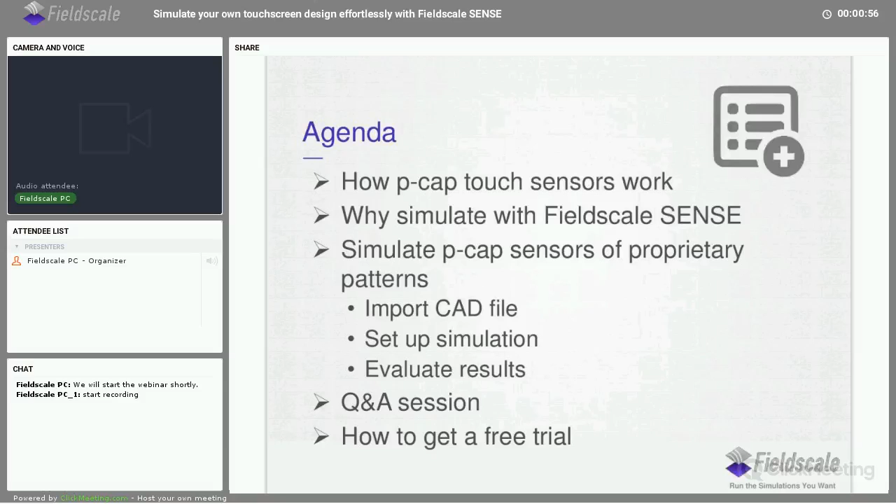The projected capacitive touch sensors consist of transmitting and receiving electrodes. The shape and dimensions of the electrode patterns are subjected to detailed research and development process. And there are many proprietary patterns out there, most often patented by the designers of touch sensors.

Generally, electrode patterns may be placed at two separate layers, the double layer patterns, or at the same layer and get joined with bridges, with crossovers. Actually, this pattern is known as coplanar or single ITO pattern. But in true single layer patterns, there are no crossovers, although the transmitting and the receiving electrodes are again at the same layer.

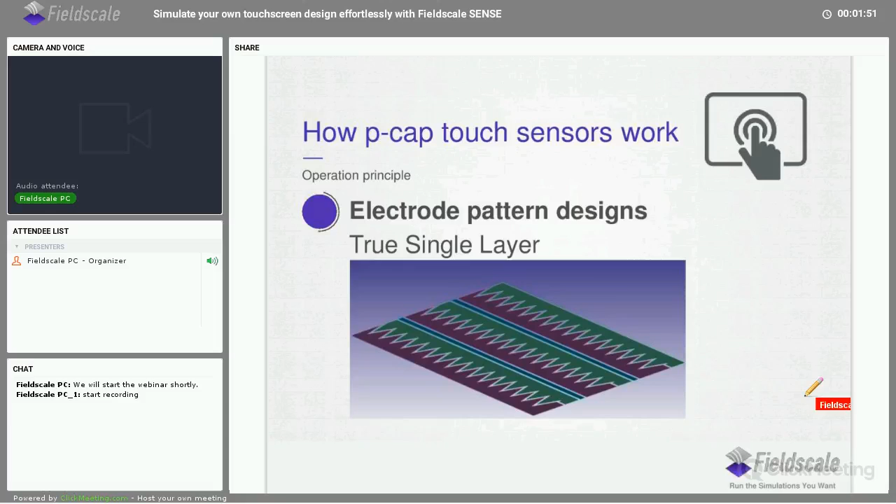Metal mesh is a new entry in touchscreen industry. It can be used to create flexible touch sensors with high transparency and high conductivity, and can be found in both double or true single layer patterns.

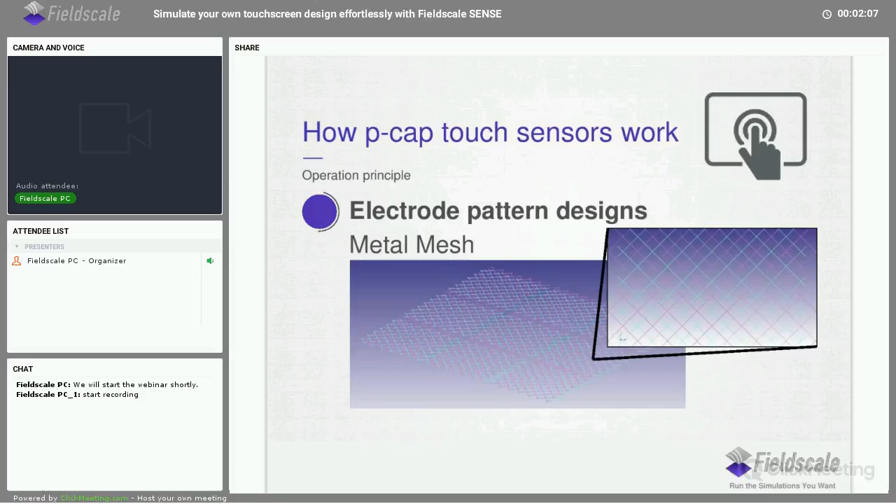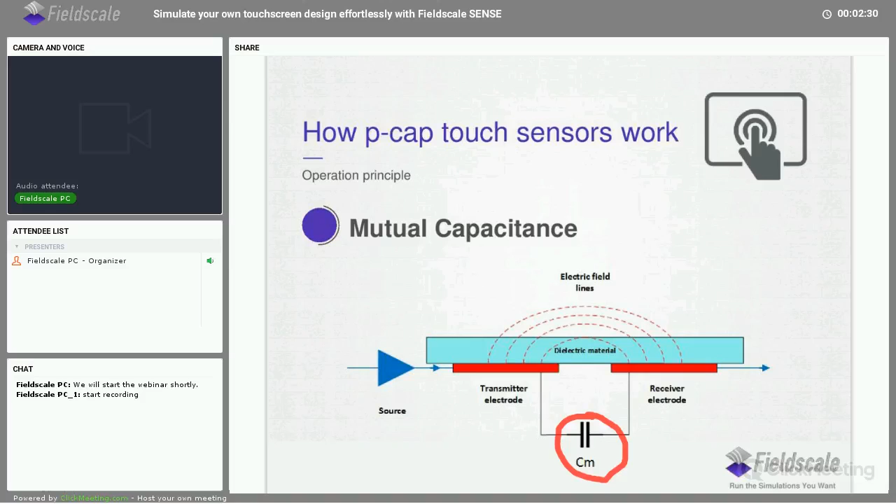Now let's see how the touch sensors work. Actually, between the transmitters and the receivers there is a mutual capacitance due to their coupling. The value of the mutual capacitance depends on the shape and dimensions of the electrode pattern and also the distance and the material between the electrodes.

Now, in case that a finger or a stylus comes close to the touch sensor, it steals, let's say, some of the electric field lines. So the mutual capacitance between the electrodes is reduced. The controller that drives the touch sensor sends voltage pulses to the transmitting electrodes and gets them back distorted through the receivers. The change in the amplitude of the voltage signal corresponds to a reduced value of mutual capacitance. And that's how a finger touch is detected by the controller.

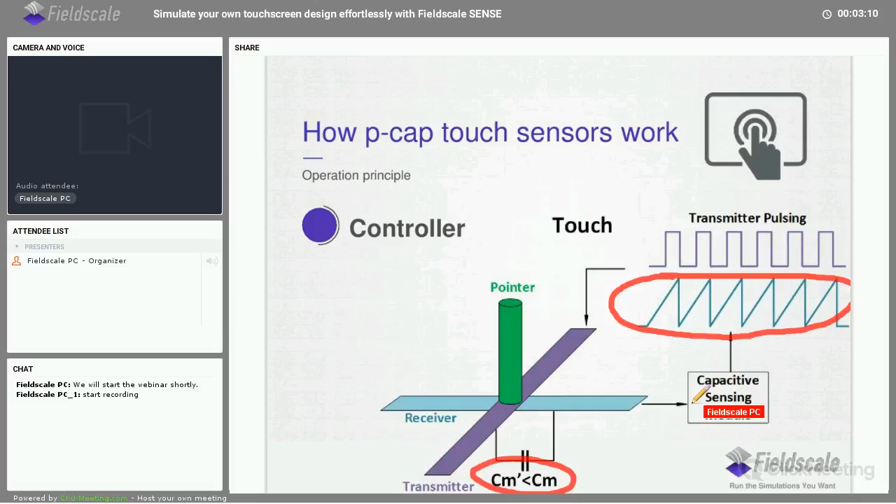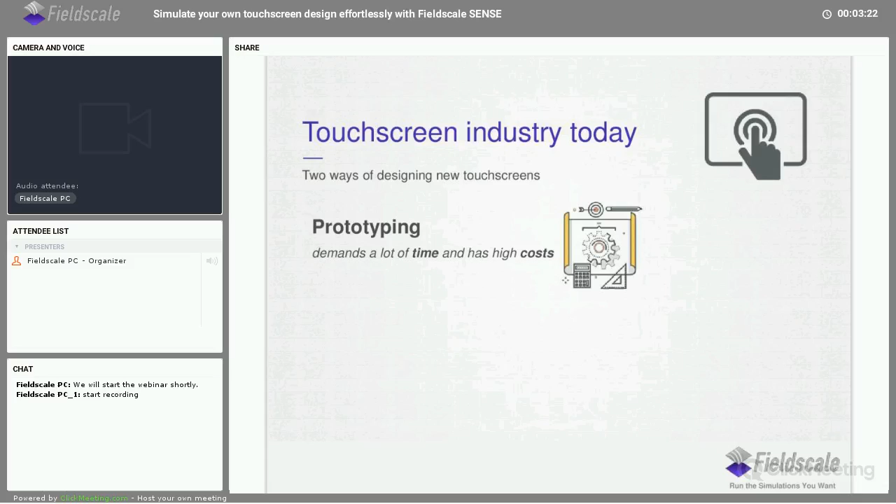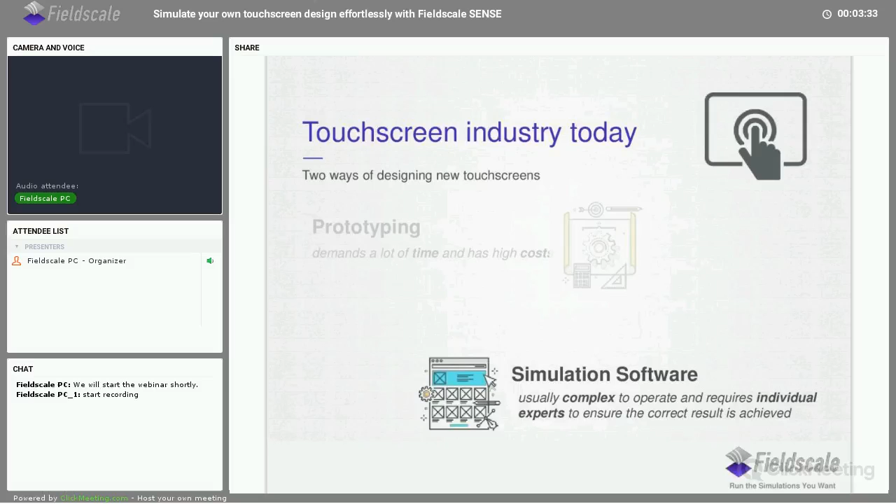Now let's have a look at how touchscreen industry works. Research and development of touch sensors was traditionally done through prototyping process, which however is time consuming and also very expensive. Simulation, of course, is an alternative option, but simulation software in general was usually complex to operate and required expert users.

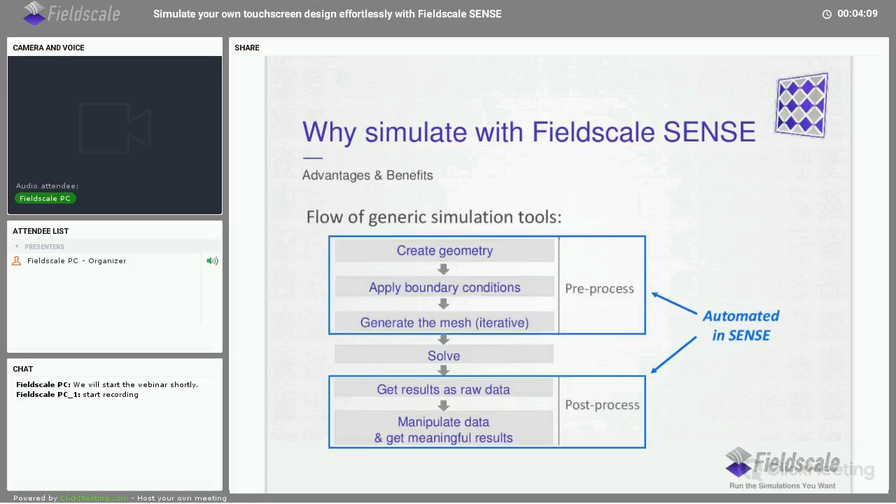This is the flow of the generic simulation tools. The touch sensor designers in generic simulation tools had to create the model geometry, then to apply the boundary conditions and generate the mesh, which is often a really difficult task. After the model was solved, they had to get the results and try to translate them into their engineering language. That's why we developed Sense, in which both the pre- and post-processes are fully automated.

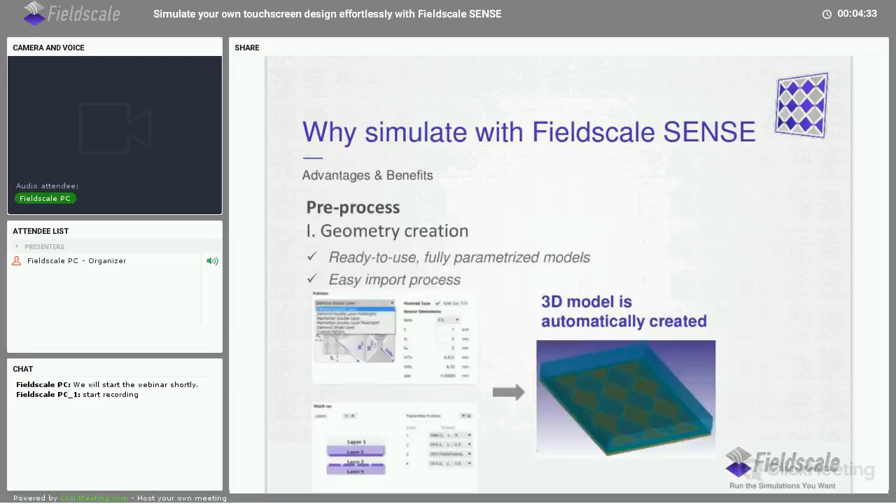Regarding the geometry creation, we have a library of ready-to-use and fully parameterized patterns, so the entire 3D sensor model is automatically created. In addition, Sense offers you the option to import your own patterns. This will be demonstrated later in detail. Through an intuitive way, you can set up parametric analysis so as to examine the performance of the touch sensor for many, even hundreds of different finger or stylus positions above the surface of the sensor.

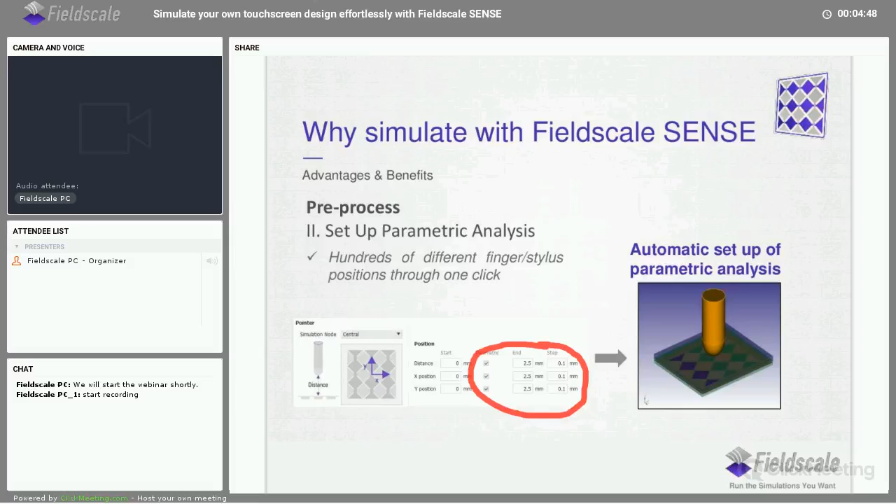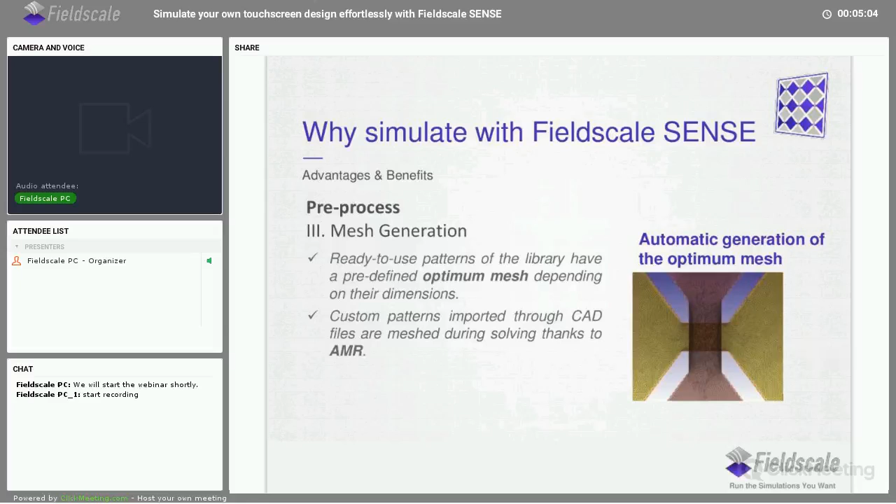You don't even have to worry about the mesh generation or how dense it must be in order to get accurate results. This is done completely by Sense, either through predefined meshing options or through smart algorithms, which are based on adaptive mesh refinement. The simulation time is much shorter than competition, as Sense utilizes fast multipole method developed on the basis of boundary element method. And thanks to the fully parallelized solving algorithms, you can take advantage of multiple CPU cores available either in our cloud infrastructure or in your cluster and solve the model just in a few minutes.

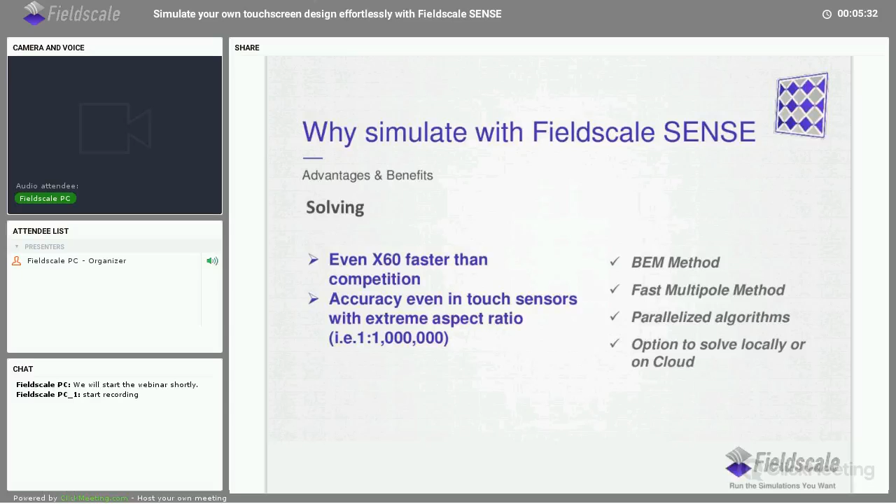Regarding the post-process, the visualization of results is adjusted to the needs of touch sensor designers. The results are shown through intuitive capacitance maps and plots, which are familiar to touch sensor designers. The comparison between the results and the specifications of the controller allows you to check the compatibility between the sensor and the controller. Furthermore, you can export all the simulation results in either a CSV file format or use our export tool to create a customizable report in PDF format.

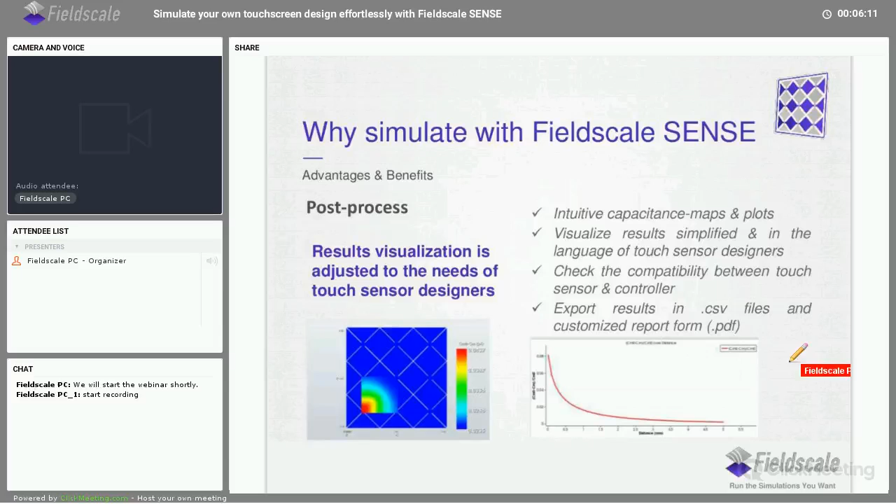Now Sakis is ready to show you the very simple process of importing and simulating customized electrode patterns into Sense.

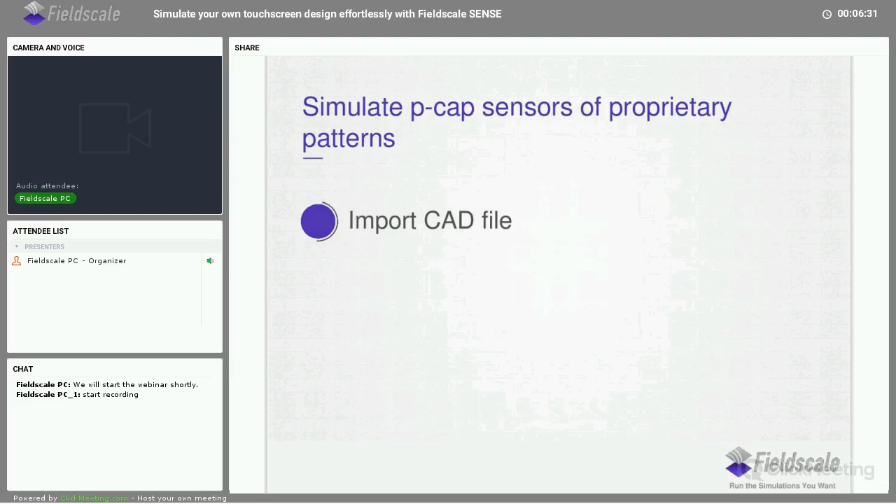Before showing you how the import process works, I have to show you a few ground rules that you have to follow when designing the DXF files used for the import. First of all, the imported pattern should be a 3x3 design, which means that it must consist of 3 transmitter and 3 receiver electrodes. Another rule is that each electrode group should be assigned to different layers.

For example, the 3 receivers should be on a layer called, let's say, RX, and the remaining transmitters on a separate layer called, for example, TX. Also, the design can include the floating parts, which are basically infills or dummy conductors, as long as they are assigned to a separate layer. Another rule is that each entity of the DXF file should be a closed polyline and not just a connected line. You have to convert the line to a polyline.

The current version of Sense supports the import of any double-layered pattern, including also metal mesh patterns and patterns with curved electrodes. I will demonstrate 4 examples. We will create a DXF file from scratch, ready to be imported, and I will showcase another 3 examples: one metal mesh pattern, another pattern consisting of diamonds and floating parts, and another one with curved electrodes. Excuse me. Now let me share my screen with you.

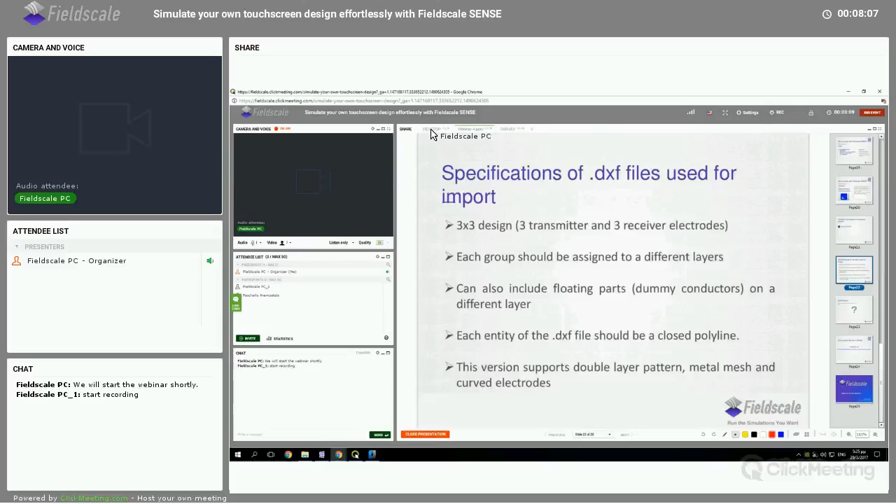Let's say that we have a DXF file that contains the whole sensor design. As you can see, this design is a design of a sensor that consists of 10 receivers and 15 transmitters. And we now have to make a few adjustments to this DXF file. For starters, let's create 2 separate layers. Let's name the first one receivers. And let's create another one called transmitters. Those are just basic operations that can be performed with any CAD software.

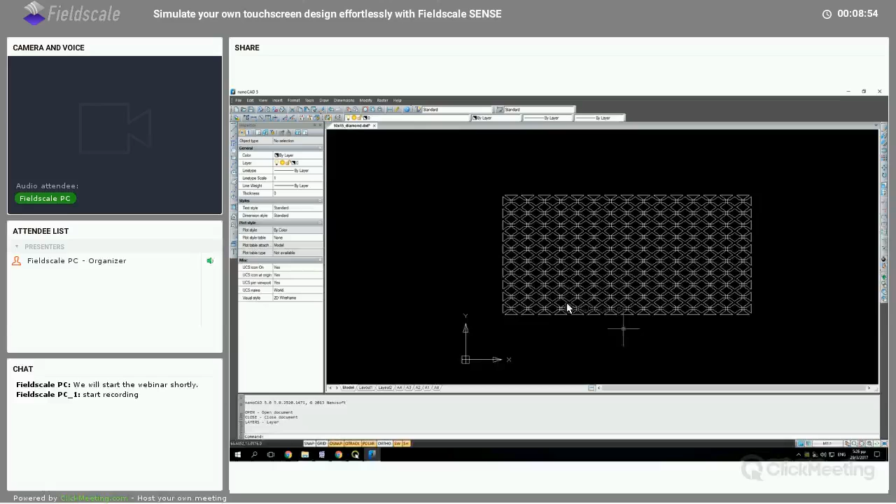Okay, as you can see, we don't need all those transmitters and receivers, so let's delete the majority of them and keep only 3 transmitters and 3 receivers. We have to slightly modify the receivers and the transmitters, and to do this, we first have to explode those polylines. As you can see, this entity is a polyline, and in order to modify it, we have to first explode it. This can be easily done by a command called explode.

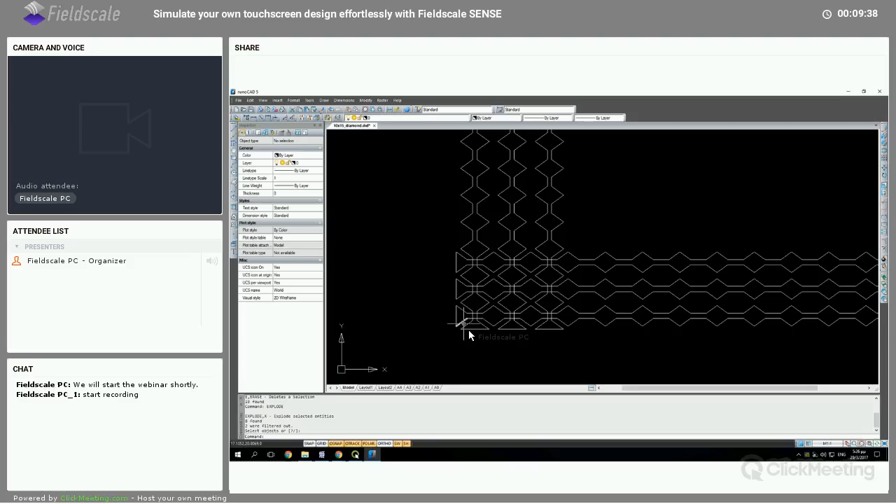And let's select all of the electrodes. As you can see now, the electrodes are ready to be modified, and we can delete all the lines that we don't need. We have to create a closed polyline, so we will have to draw some additional lines. This is really easy, and you have to repeat this process for all the electrodes.

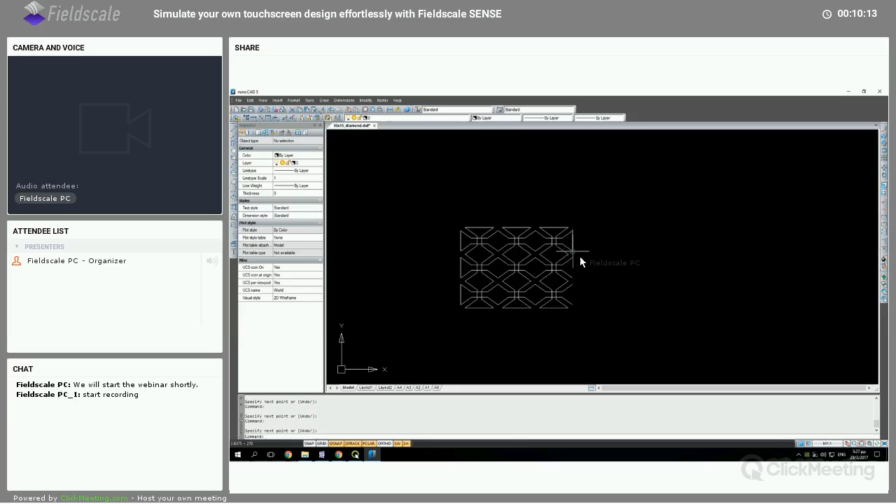Okay, now that we have a closed loop of lines, we have to convert those lines back to polylines. This can be easily done as well. Let's start with the transmitters. The software asks us if we want to turn this into a polyline. We click yes, and then we click to join it with the rest of the lines. Now you just have to be a little careful to select the correct lines, but this isn't too difficult. Hit enter, and as you can see, we have created the closed polyline.

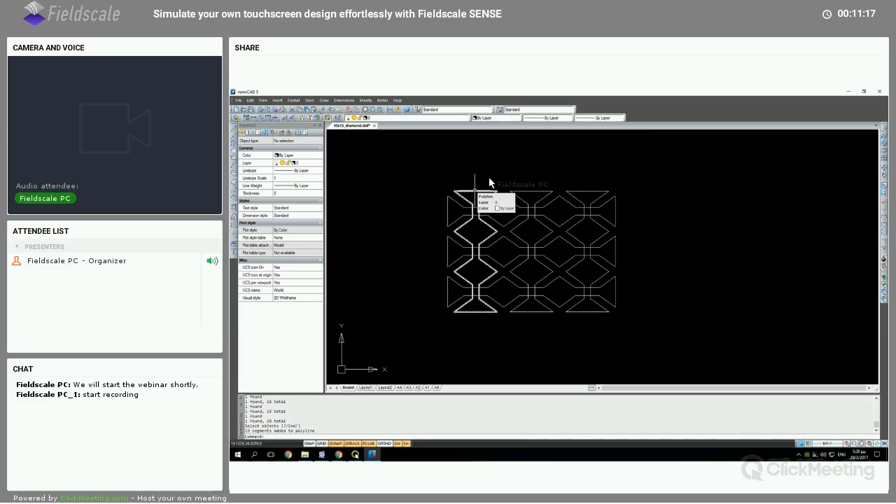Now we have to repeat the same process for the rest of the transmitters. This shouldn't take long. Okay, this one is also ready. And let's do this one last time.

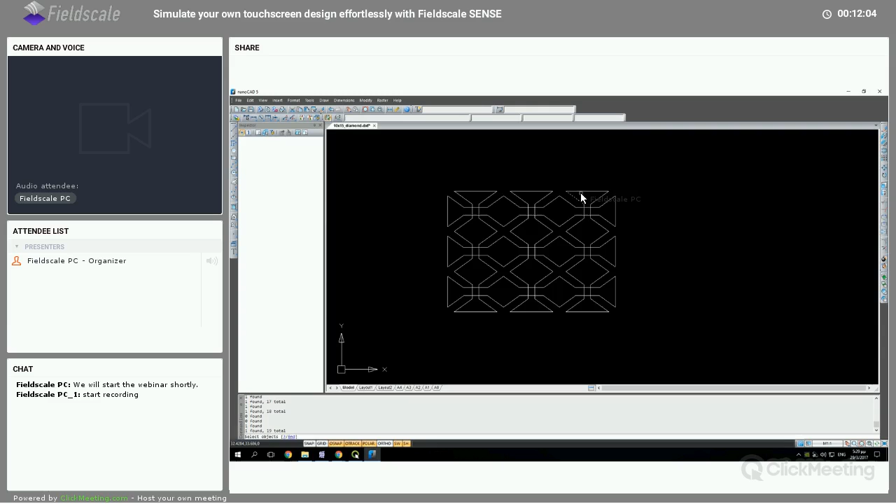Okay, so we have three transmitters, three entities that are closed polylines, and let's place them to the correct layer, which is the transmitter layer. This should do the trick. Let's confirm that they are placed there. Yes, that's right.

And now we have to do the same process for the receivers. This time the process is a bit easier because we can select multiple lines. That's it.

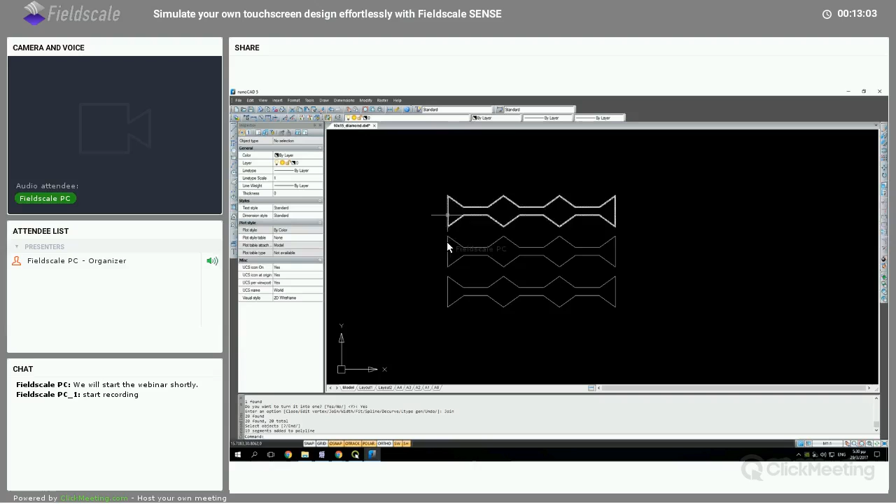Okay, and the receivers are also ready. Let's place them onto their own layer. And let's check that each layer is correct. Yes, we are ready. Now all you have to do is save it as a DXF file. Okay, let's call this one Diamonds Test. And save it on the desktop.

And let's see now how we can import this DXF file into Sense. First of all, you have to navigate to the pattern section of Sense, and then on the scroll down menu, you have to select Custom Pattern. By clicking Create New, you open up the Sense Design tool. Basically, the Sense Design tool is the import module and the tool with which you can design your own patterns. We will click on CAD Import.

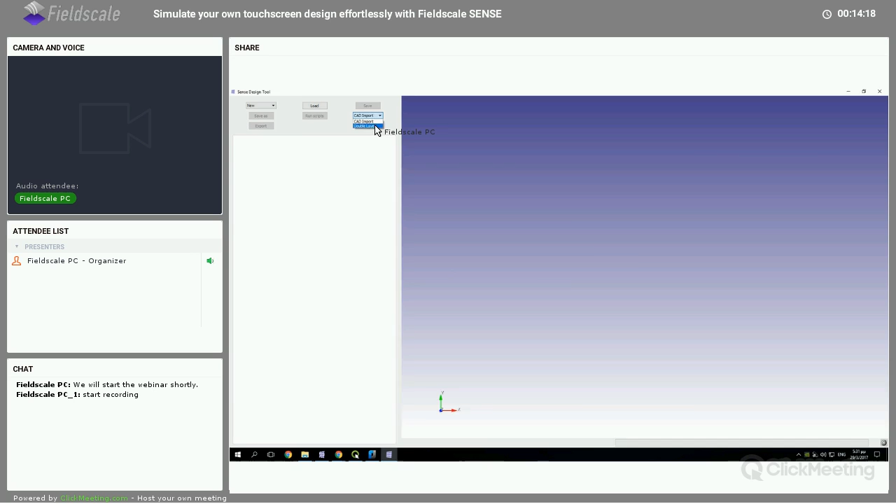At the time, we support the import of only double-layered patterns, but by the end of April, it will also be available to import the coplanar patterns, and on the next versions, you will also be able to import through single layers and whatever else you would like. Now let's open the CAD file. This is the one that we have created.

And as you can see, the layer extractor recognizes the two layers that we have created, and it informed us that there are three entities in each layer. Now you have to assign each layer to the receivers and the transmitters, and just click Import. As you can see, Sense has imported the DXF file, and now you are ready to export it into an SDS file, which is basically the file that can be imported as a pattern into Sense.

Also note that this yellow line represents the dielectric margins around the electrodes. You can specify this from the margins tab. And let's give this pattern a margin of 1 millimeter on the y-axis and 2 millimeters on the x-axis, and redraw it. As you can see, we have added a thicker dielectric margin around the electrodes. Now, by clicking export, we will create the SDS file. Let's save this on the desktop as well.

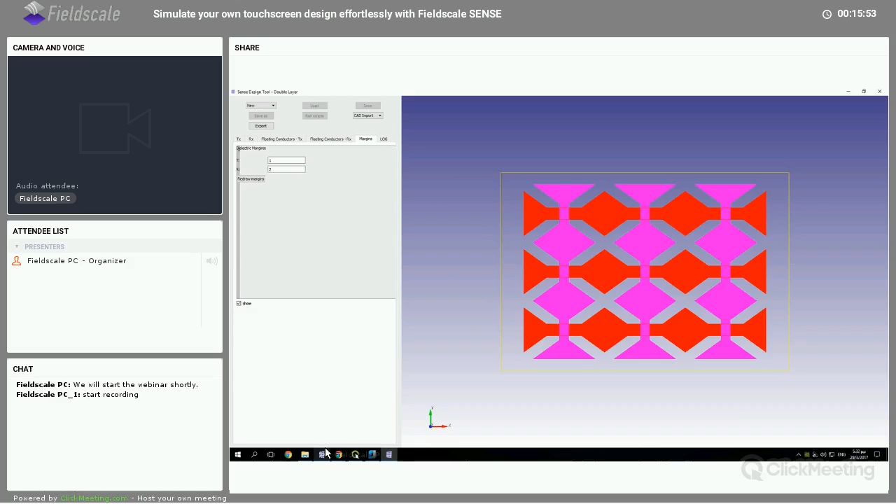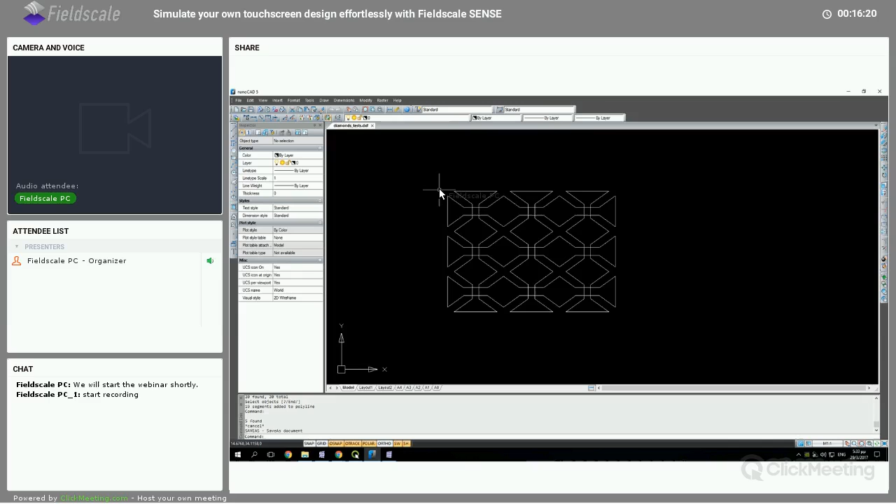And now move back to Sense GUI. By clicking load, you can load up the pattern that you have created. Now you are basically ready to set up the simulation, and Vasilis will briefly explain later on the different options that are present in Sense. Now just bear with me a little while longer. I will show you another 3 examples. We won't create them from scratch. I have created them earlier, so as to save you some time.

Let's open up the diamond with the floating parts. Okay, so there's a lot going on right now. Let me turn some layers off in order for you to understand what we did here. As you can see, those are the receivers, 3 receivers, and with yellow, those are the floating infills or the dummy conductors that are present. And the same holds true for the transmitters as well. Let me show you those as well. You can see 3 transmitters and floating parts.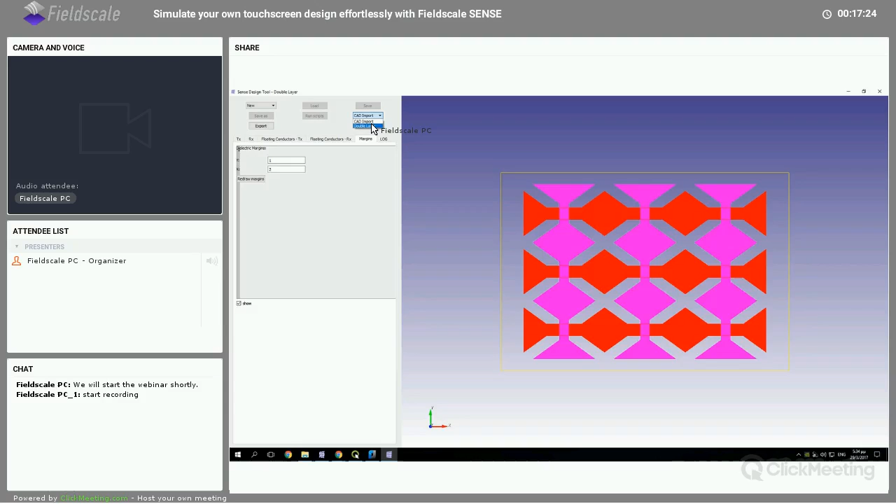You have to follow the same process as earlier in order to import it into the Sense GUI. First of all, click Import, CAD Import. Open the DXF file. As you can see now, we have more layers because there are 2 additional layers representing the floating parts. You have to assign layers again. And just click Import.

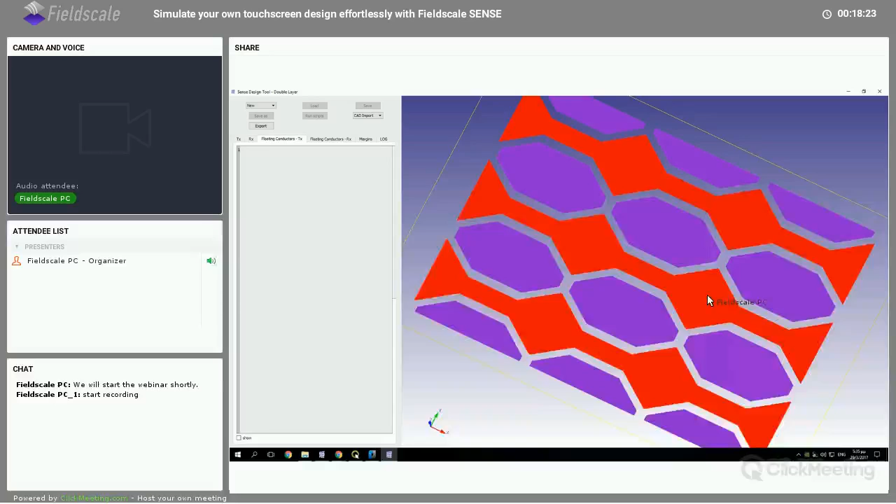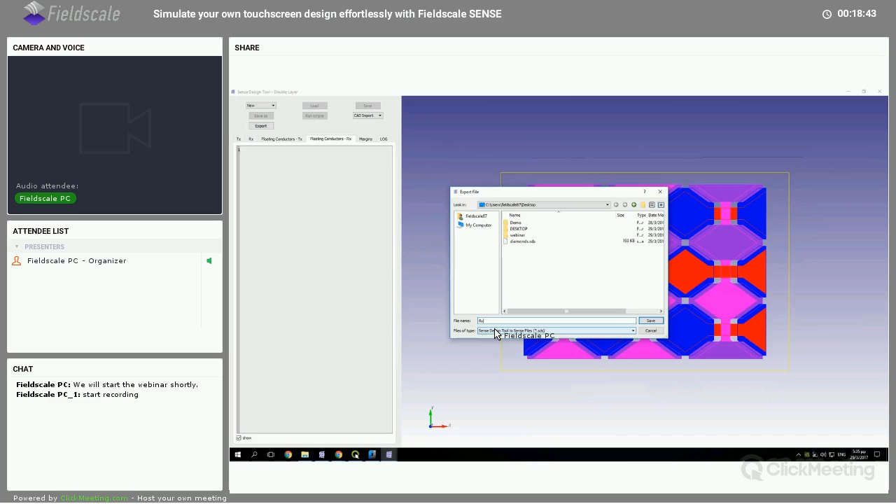As you can see, the image is a little bit crowded right now, but you can toggle visibility on and off from this button, which says Show. If you uncheck it, you can turn visibility of those entities off. And now you can review your pattern if it is correct and if the design has any flaws. And you can do the same for the receivers as well. Now let's click Export and call this floating. And then you can just load it up in Sense again.

Okay, let's see now a metal mesh pattern. Metal mesh patterns are a little bit more demanding, but we handle them quite easily. As you can see, this is again a 3x3 pattern. Let's import it into Sense. As you can see, this is a quite dense mesh. You can see each electrode has been imported correctly.

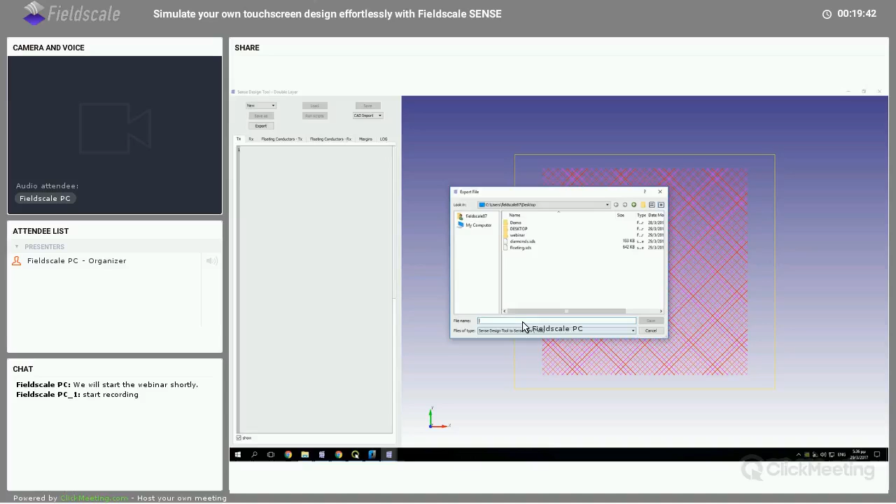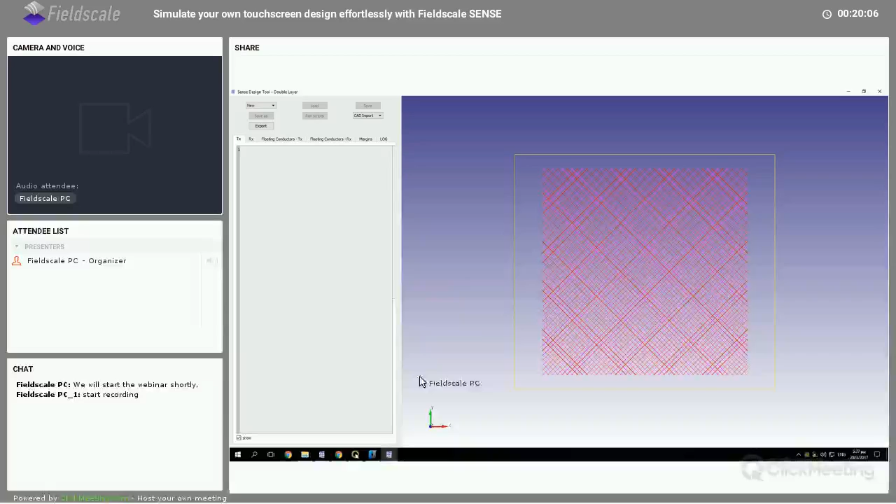Now the process is again the same. You just click Export and save it as an SDS file. I can demonstrate this again. And now you can proceed solving the metal mesh pattern and setting up your dielectric stack-up and figure positions and so on. Now let me show you the last example of a pattern which has curved electrodes.

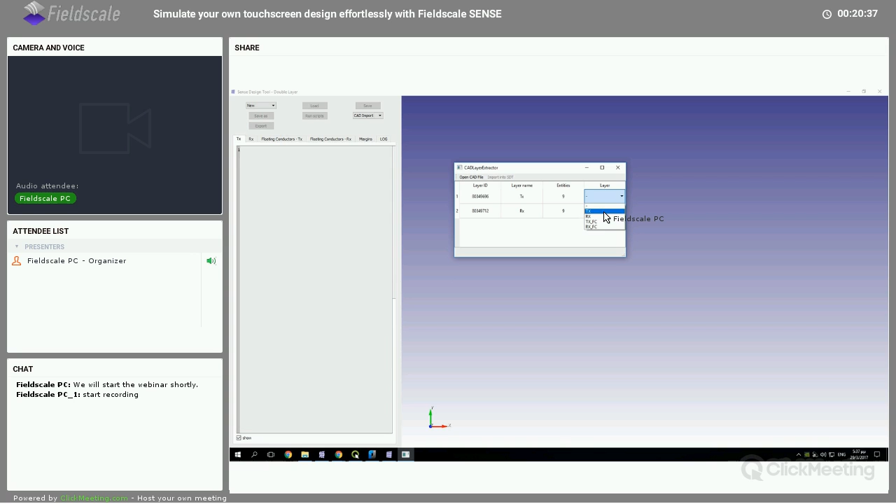As you can see now, the CAD layer extractor says that there are more entities present. This isn't a bug or a problem. It's just the way that the DXF was designed. Sense will stitch those entities together and create the 3x3 pattern. As you can see, again, the pattern consists of 6 electrodes, 3 transmitters, and 3 receivers, with curved lines.

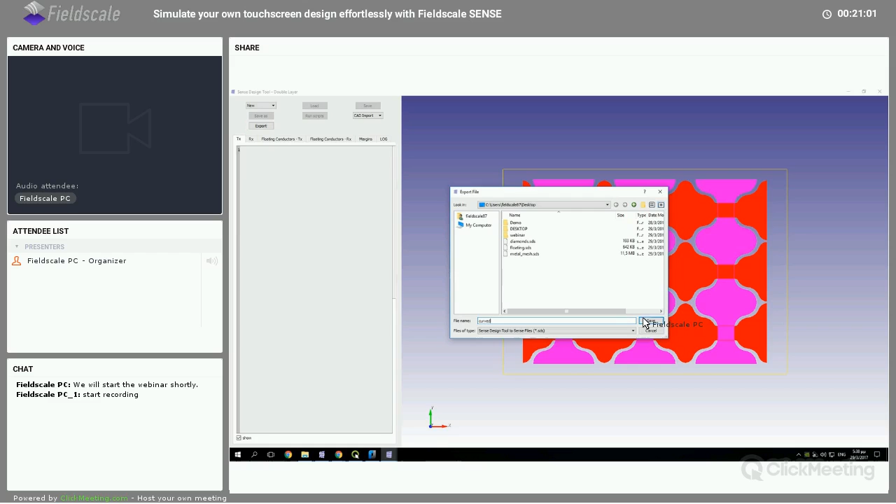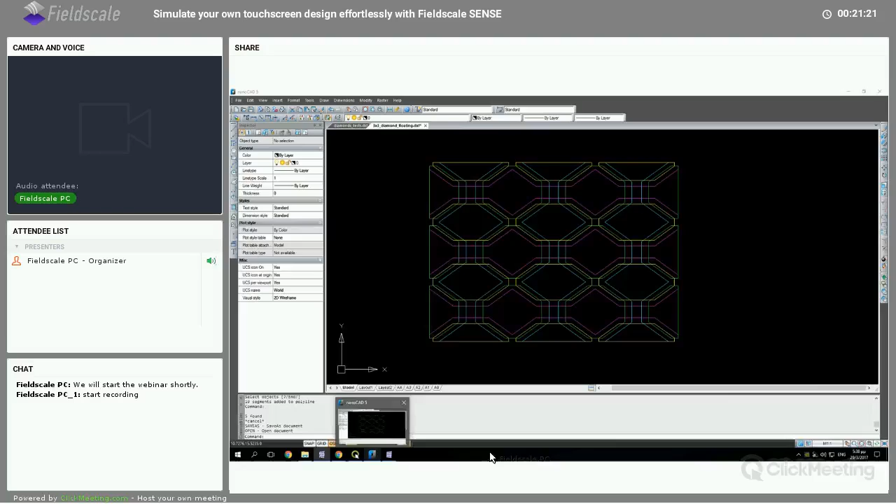And by now, you already know the process. Just click Export. Let's name this curved. And let's open this up from the load button. And that's basically it. I think it's a quite simple process. It doesn't take up a lot of time. As you can see, you can create any DXF file in less than 10 minutes, let's say.

And now I will give the microphone back to Vasilis. He will talk a little bit about the Sense GUI and how to set up a simulation. Thank you, Sakis, for the presentation about the import tool. Actually, I'll show you now briefly the process that one has to follow in order to get some results.

So firstly, the user has to set up the analysis type. For example, the sensor may be a mutual or a self-capacitive one. Or we could hold the smartphone, for example. In this case, it's an Earth model, or maybe it's left on the table. So here we have to select the floating model.

Through Sense, the user can check the compatibility between the touch sensor and the controller. That's why we have included in Sense a library of several commercially available controllers, which differ, first of all, in the number of transmitters and receivers that they can support, which actually depends on the size of the sensor, and the range of the capacitance that they can support.

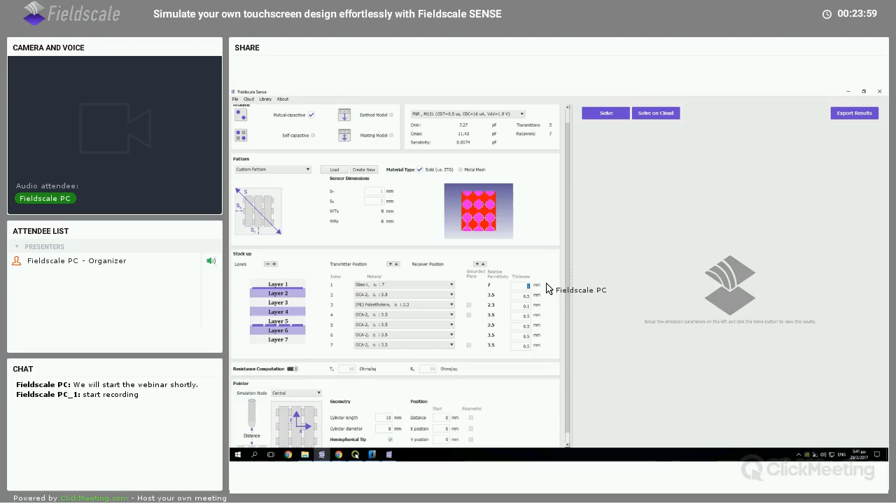You can change the material. For example, you may have a glass on top of the touch sensor, and of course you can insert the thickness of each dielectric layer. So here you define the materials from the top of the touch sensor to its bottom, where a grounded plane, maybe for shielding purposes, may exist.

What comes next? The user has to define if they want to have results about the resistance of the electrodes. These results are very important for the designers of touch sensors, since together with the capacitance, it defines the charge time of the touch sensor, the performance of the touch sensor. So here the user has to give the value of the sheet resistance of the transmitting and the receiving electrodes respectively.

The most important feature of Sense is that the user can set up very easily a parametric analysis regarding the performance of the touch sensor for several, even hundreds of different finger positions. So the user simply has to define the start and the end point of the finger movement along each direction, the Z, X and Y direction, and of course define the step of this finger movement.

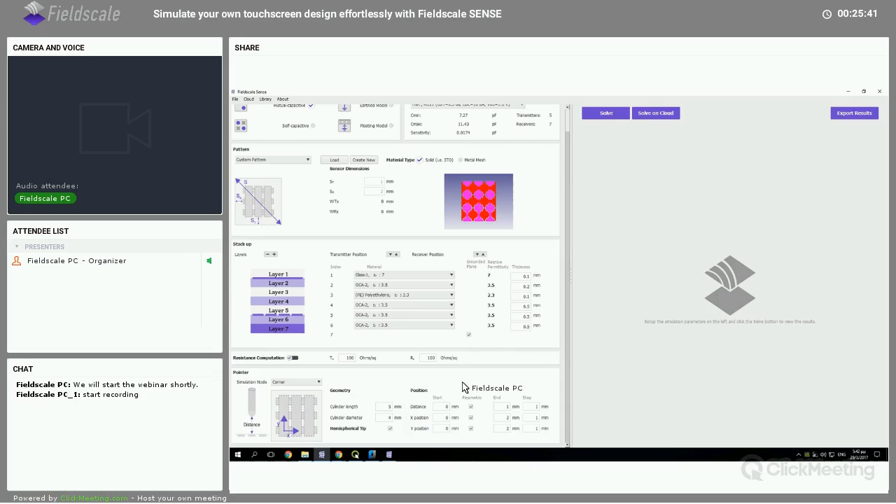Of course, we can get results for different simulation nodes, if it is a central, edge, or corner node, and change the dimensions of the pointer, if it is a finger or a stylus, for example. So once the simulation is set up, I'll show you the results by loading a solved diamond double layer pattern. These are the results of Sense.

Here you can see the sensitivity of the controller as defined earlier by the user. And this is the value of the mutual capacitance between the electrodes without any finger presence. Here we see the values of the resistance of one unit cell of transmitters and receivers respectively. This heat map shows the simulated 3x3 electrode array.

But at the corner of the node, this reduction is much smaller, and it is depicted by the blue color here. Of course, the heat map may give different quantities regarding simulation results of capacitance and resistance of the touch sensor. And what is very useful for the touchscreen designers is this filtering option.

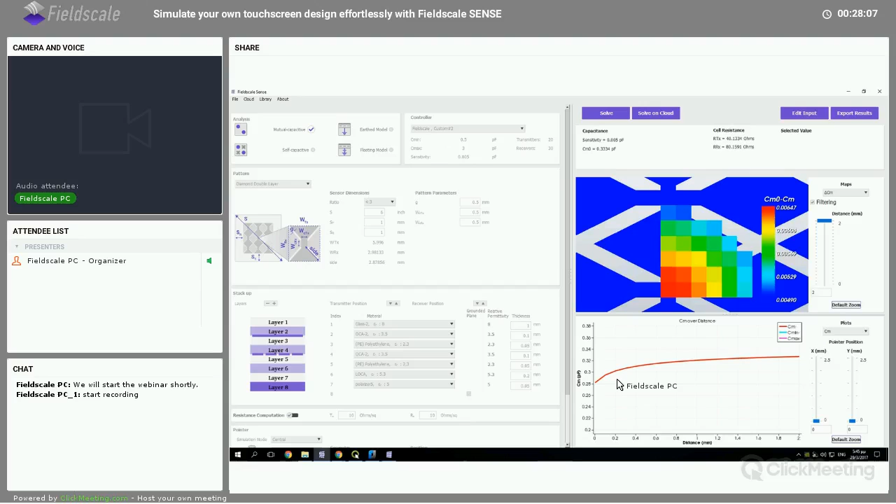That's why they are not shown in this heat map. Later on, here we can see a plot of the mutual capacitance versus the distance between the finger and the surface of the screen. It's shown by this red line, red curve here. And we can easily understand that when the finger comes close to the surface, the mutual capacitance reduces.

And the designer can have a very quick answer if this whole variation of the mutual capacitance is within the limits given by the controller specification. Actually, in this case, the mutual capacitance is below the range of capacitance that can be detected by the controller. So this controller is not compatible with this specific touch sensor.

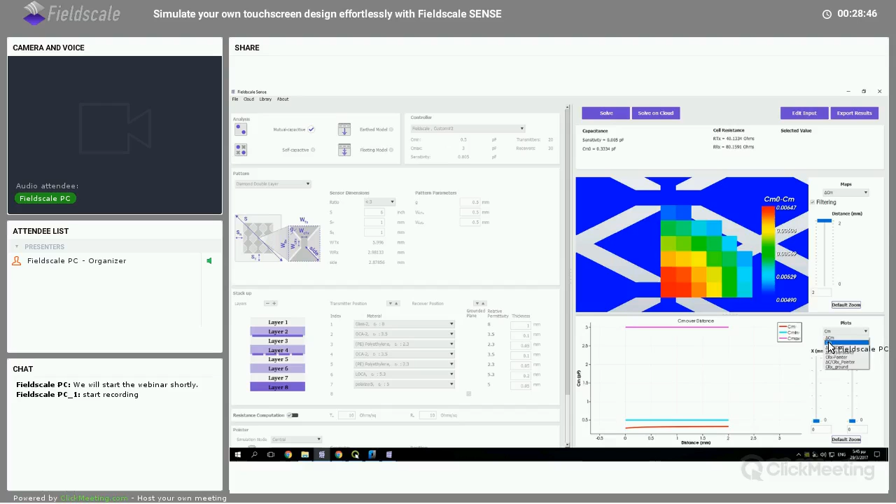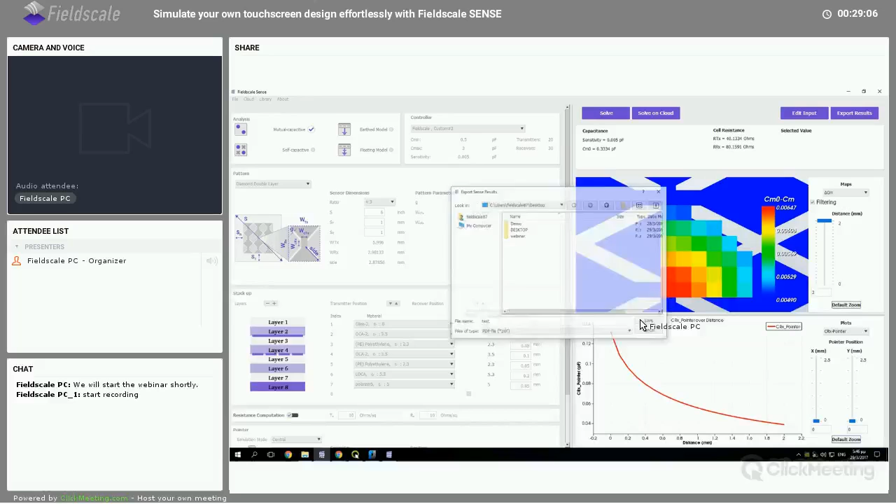And again, we can have different results here shown in the plot regarding capacitance and resistance results. What is also very interesting is that you can have an automatically created PDF report which gives you briefly the most important inputs and outputs of the simulation. You have all the information included here.

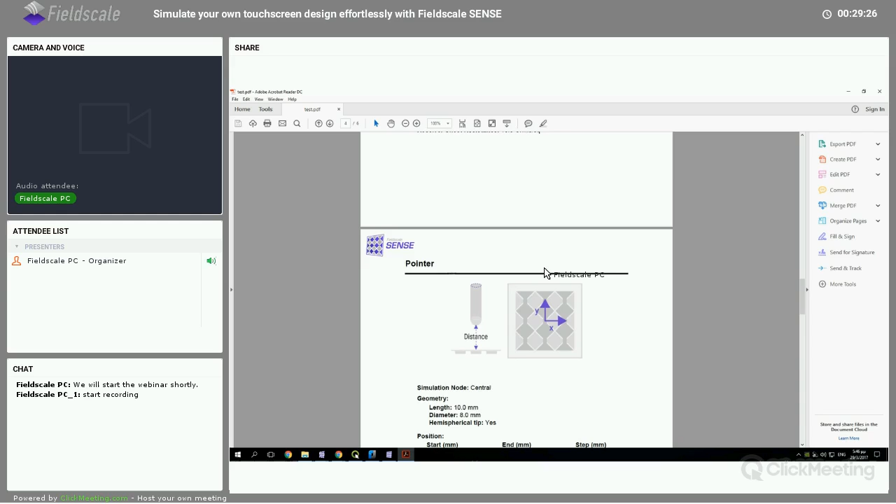First of all, regarding the analysis type, the controller, the pattern, which is also shown schematically. The same applies for the stack up, the pointer position, the parametric analysis, and of course the results with the heat map and the capacitance plot.

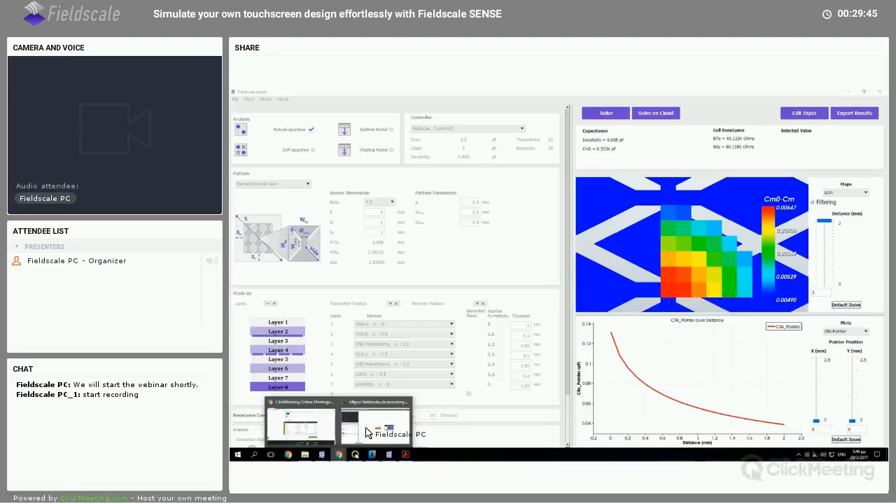That was a short description, a short presentation of Sense and about how you can simulate your own proprietary patterns.